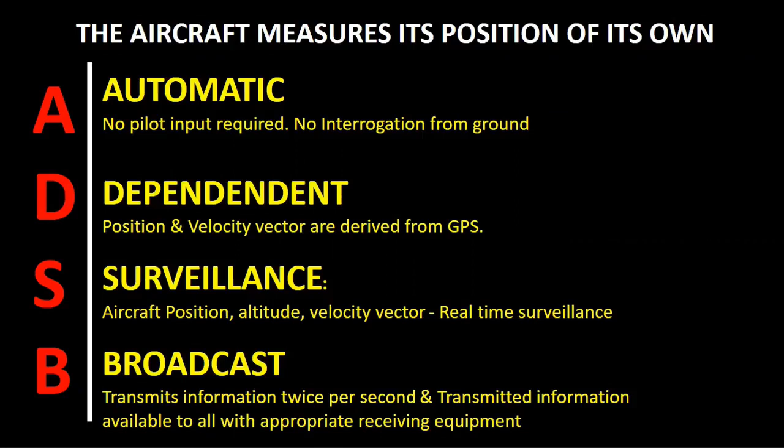Broadcast: in this system, the aircraft has a special transponder that broadcasts information of aircraft position, speed, altitude, state vector at a much higher rate of twice per second. ADS-B broadcasts its position automatically at a very high update rate of twice per second. This information is used for real-time surveillance service by air traffic controllers. This coverage is limited to the line of sight.

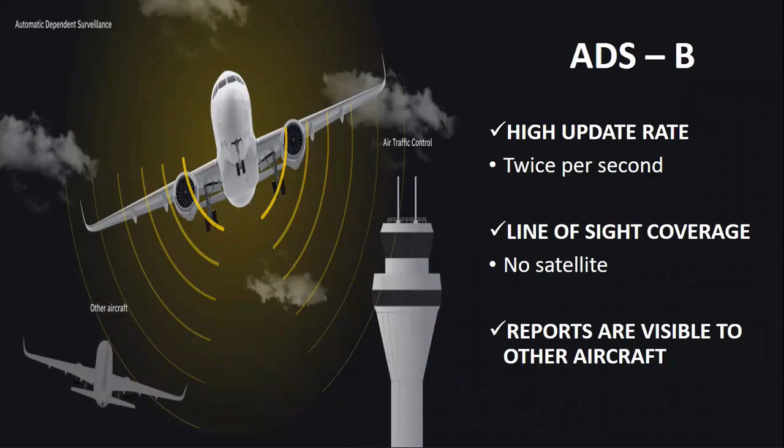ADS contract: reports such as top of climb, position reporting points at specified time intervals are sent by the aircraft in accordance with a contract set up with the ground ATC system. These reports basically replace verbal reports from the pilot and facilitate the application of procedural separation in oceanic airspace.

Radar signals are sent between radar and aircraft transponder to calculate aircraft position. Radar updates the air traffic control system with information about the aircraft every 5 seconds.

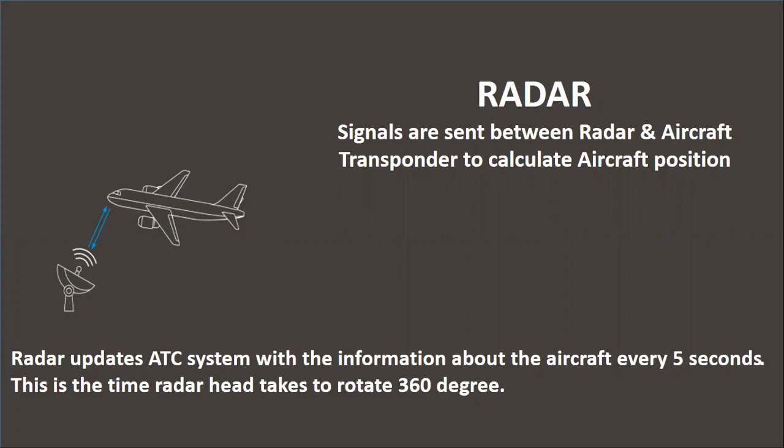An aircraft with ADS-B capability determines its position using GPS. The Mode S transponder then broadcasts that position at rapid intervals, along with identity, altitude and velocity information. Dedicated ADS-B ground stations receive the broadcasts and relay the information to air traffic control for precise tracking of the aircraft for radar control.

The ADS-B data link supports a number of airborne and ground applications: cockpit display of traffic information, airborne collision avoidance, improved search and rescue, airport ground vehicle and aircraft rescue and firefighting vehicle operational needs, and oceanic control.

ADS-B consists of 3 components: transmitting subsystem, transport protocol, and receiving subsystem. The transmitting subsystem generates a message in the aircraft and broadcasts it to all.

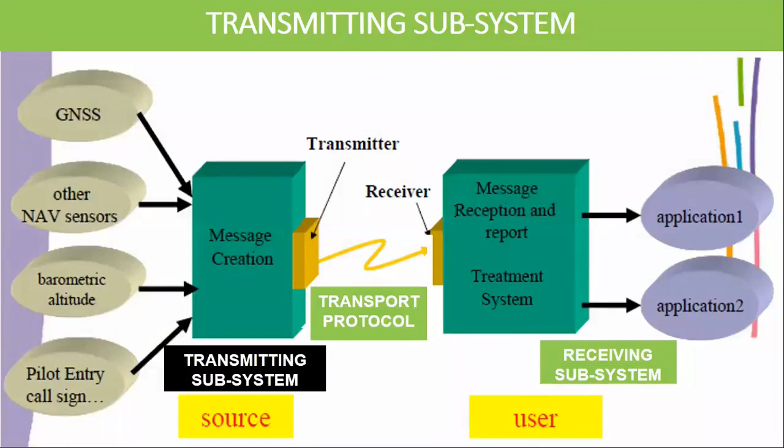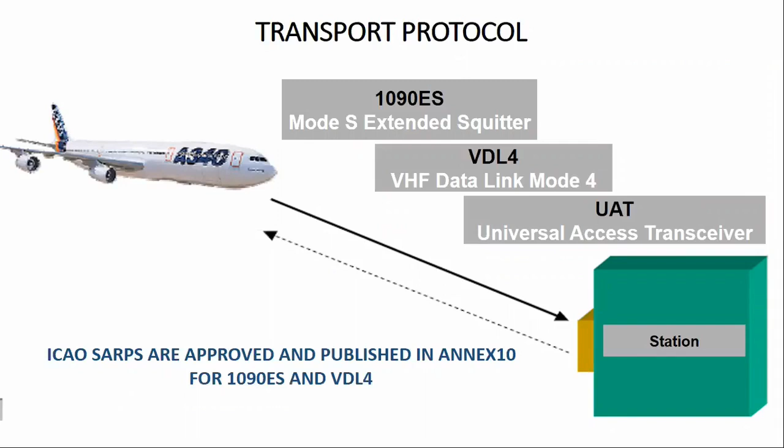Transport protocol: currently there are 3 kinds of data link - Mode S 1090 MHz extended squitter, VHF data link mode 4, and universal access transceiver. ICAO has approved the 1090 MHz Mode S extended squitter technology for the data transport protocol to ensure global interoperability.

The 1090 extended squitter downlink format has 2 different message sets. Short squitter response signal has 56 bits, a short message. Extended squitter has 112 bits, a long message.

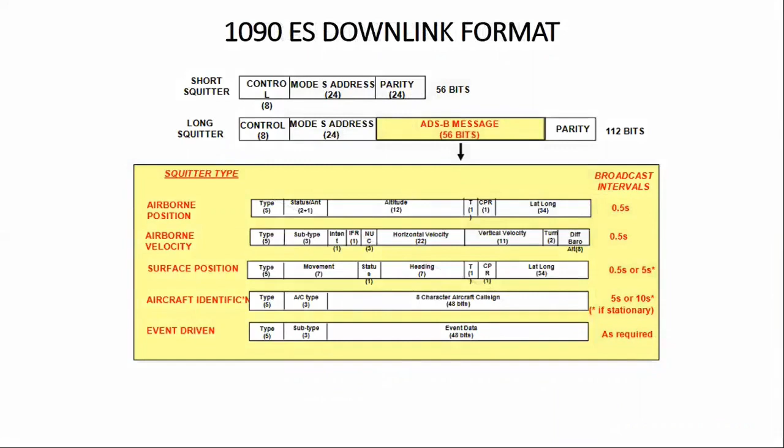Types of ADS-B: ADS-B out is the transmission of ADS-B information out from an aircraft to other aircraft or to the ground station. The signal is broadcast at approximately every half a second. ADS-B in means the aircraft or ground receiver is fitted with an ADS-B transmitter as well as a receiver.

Cockpit display of traffic information is the onboard reception of ADS-B out transmission to allow display of nearby traffic, weather, terrain, and airport maps to the pilot of an ADS-B equipped aircraft.

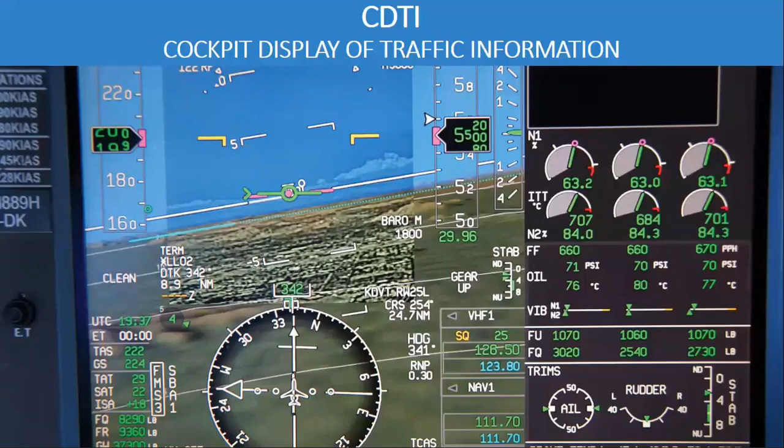Flight plan requirement: when requested by ATS to specify the type of transponder carried aboard the aircraft, pilots shall indicate this by inserting the specified characters under item 10 in the flight plan. B1 indicates ADS-B out capability. B2 indicates ADS-B out and in, both capabilities.

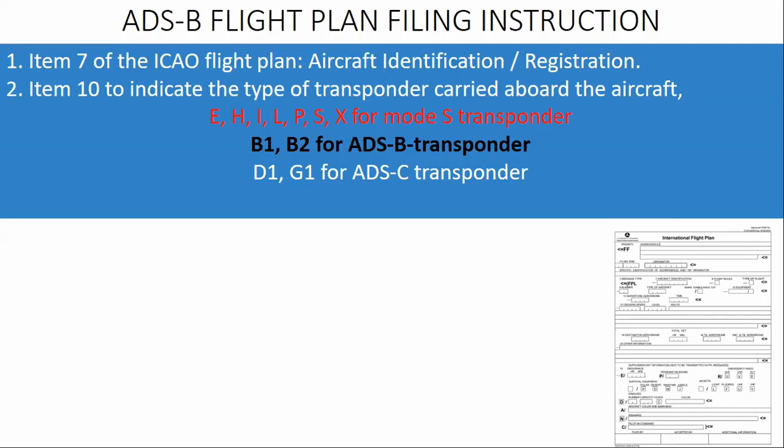ADS-B surveillance quality indicators: ground verification of ADS-B data is not performed. The ground receivers should be capable of detecting, tracking and identifying targets equipped with ADS-B transponder as per ICAO standards and recommended practices mentioned in Annex 10 Volume 4.

Aircraft will obtain its position from GPS, thus GPS integrity comes into picture. Receiver autonomous integrity monitoring is a technology developed to assess the integrity of GPS signals in a GPS receiver system. Thus, GPS will calculate horizontal protection level, the integrity of the horizontal position from the GPS system. This will be broadcast by the aircraft transponder or ADS-B transmitter.

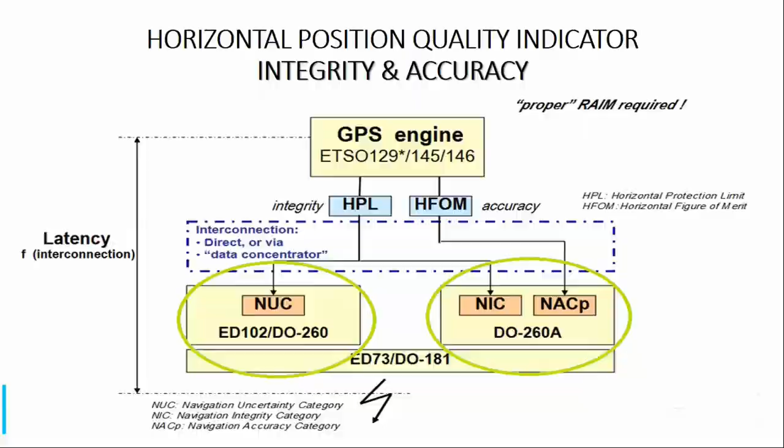The output of the transmitter consists of position and other data like altitude, aircraft identification, special position indication, emergency message codes, plus NUC or NIC. Horizontal protection level is the expression for the integrity. The true position of the aircraft outside the radius of containment will be only 10 raised to the power of -7 per flight hour.

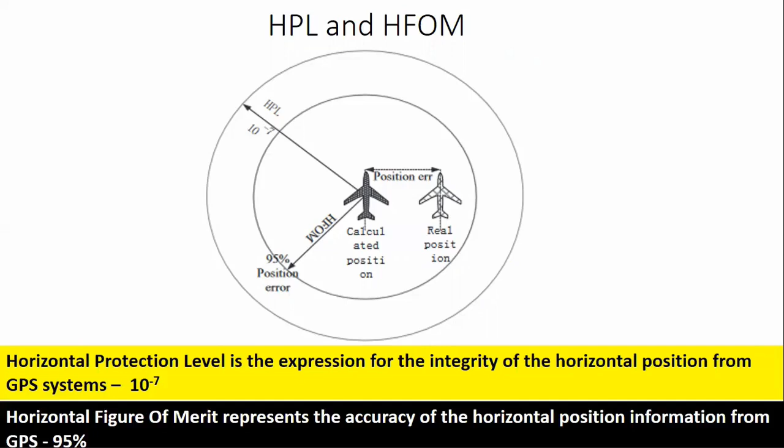Horizontal figure of merit represents the accuracy of the horizontal position of aircraft. 95% of the time the real position of the aircraft and the calculated position of the aircraft by GPS will lie in the radius of containment, RC. The parameters horizontal position quality indicator, integrity and accuracy are encoded in the transmitted message from the aircraft.

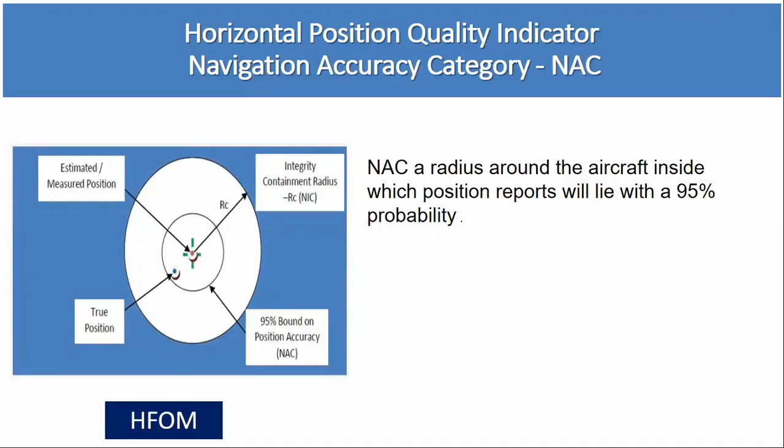Navigation accuracy category is a radius around the aircraft inside which aircraft position reports will lie with a 95% probability. Navigation integrity category defines the radius of containment, RC. All target reports should lie inside the radius of containment, RC. The NIC value is important in ensuring the safety of the system by limiting the probability of false targets being established.

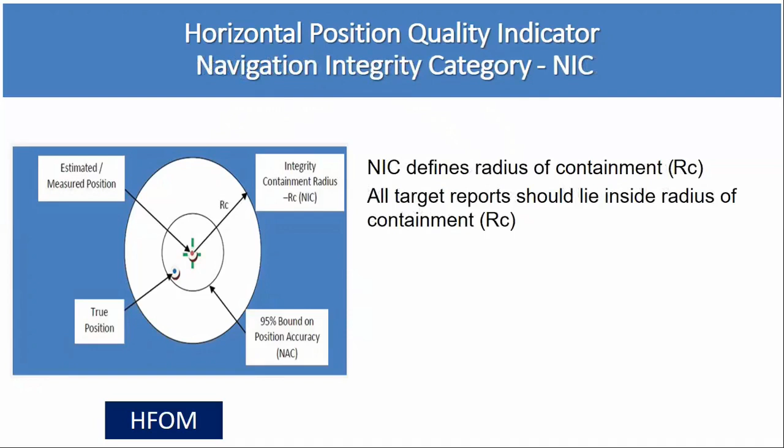Source integrity level: there is a probability that the aircraft position may be outside the radius of containment and still no alert is received. SIL equals 3 means the probability of aircraft position outside RC is less than once per 10 million flight hours.

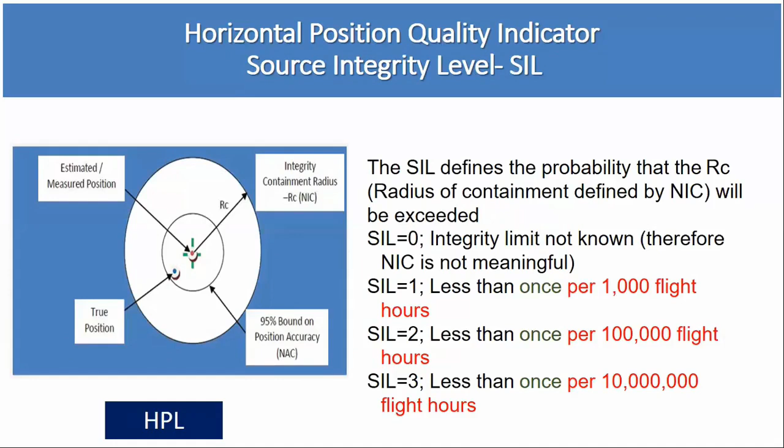Navigation uncertainty category is adopted to give a combined expression of accuracy and integrity requirements through a single parameter in Radio Technical Commission for Aeronautics, version DO-260. RTCA DO-260 is the minimum operational performance standards for 1090 MHz ADS-B.

As per ICAO, ADS-B information shall be used for the provision of air traffic surveillance services, provided the NUC is equal to 5 or greater.

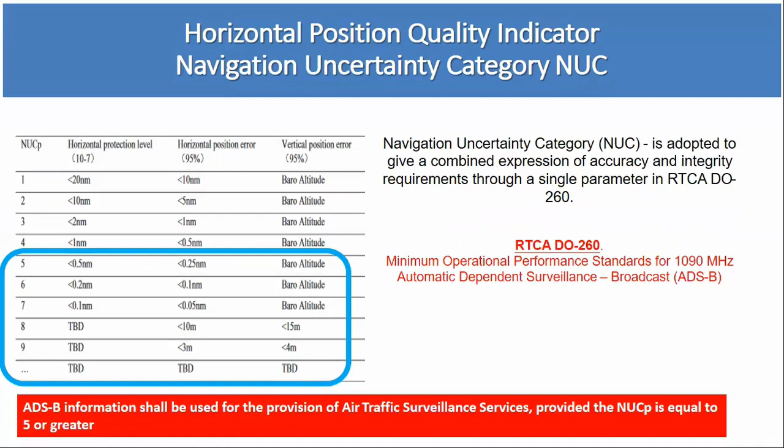Once received by a ground station or other ADS-B in aircraft, which will determine position and FOM derived from the HPL, the information will be sent to the ATC display system using the ASTERIX 21 format. ASTERIX is all-purpose structured Eurocontrol surveillance information exchange, a standard for the exchange of air traffic services, ATS, information. It is developed and maintained by the European ATS organization Eurocontrol.